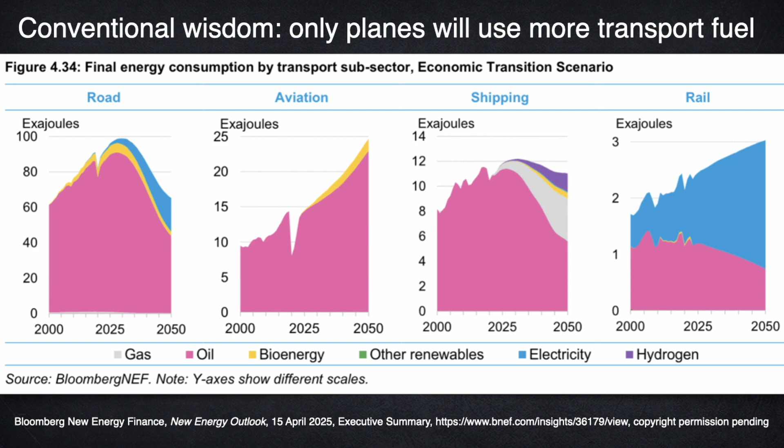By 2050, it's only 7% displaced by bio-based sustainable aviation fuel in gold. But this projection assumes that aviation fleet efficiency will rise only 8% by 2050. That's a lot slower than historically. Let's see how to falsify that assumption and make the aviation graph look like the other three.

I'm originally a recovering physicist, but for the past half-century I've been a practitioner designing super-efficient vehicles, buildings, factories, and equipment. Each winter and spring quarter, Joel Swisher and I teach that experiential course Holmes mentioned on how integrative design can make the energy efficiency resource several-fold bigger, but at much lower cost than normally assumed, and often with increasing returns. So the more you save, the cheaper it gets.

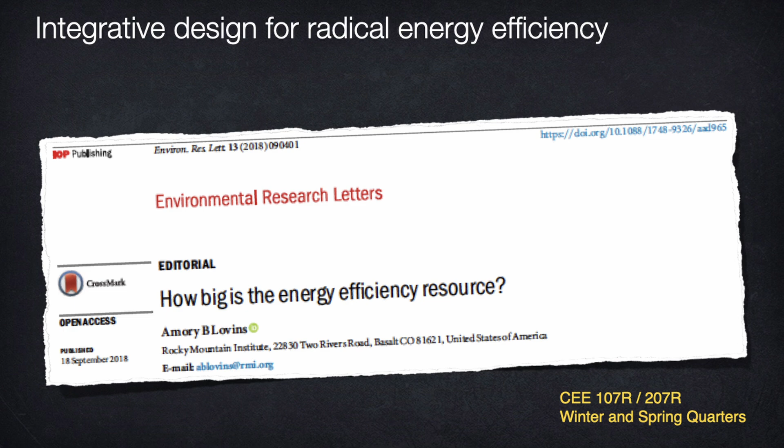And that's because, as this paper shows, we use not more or fancier widgets, but fewer and simpler widgets, more artfully chosen, combined, timed, and sequenced. So we design a lot of stuff out.

In 70-odd years and many millions of miles as an airline passenger, I've observed that airframe makers, although they are very good at what they do, could get much better at integrative design. What's their challenge? How far do airplanes need to fly, for example?

Well, a 12,000-kilometer flight like Sydney to San Francisco is in the rightmost bar of BNEF, Bloomberg New Energy Finance's distance histogram here. But such long routes are very exceptional. Of the global aviation carbon emissions in 2023, over half came from short trips on narrow-body or smaller planes. That's the dominant four aqua bars on the left side of the graph.

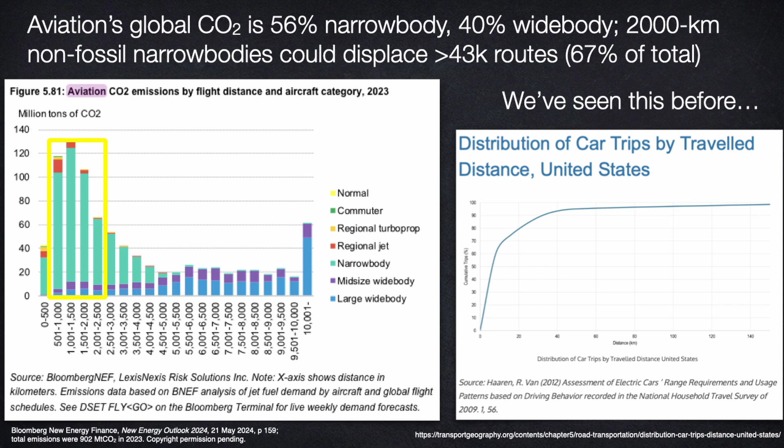Just a 2,000-kilometer range could cover two-thirds of the routes. Indeed, over a sixth of the emissions come from 1,000-kilometer or shorter routes. That's a big entry market to grow volumes, improve technologies, and cut costs.

We have seen this before. When Tesla introduced the first lithium-ion battery car in 2009, about 80% of U.S. car trips were under 20 kilometers, 96% were under 100 kilometers.

The two-seat Roadster adopted electric drive in a lightweight Lotus Elise fiberglass and aluminum sports car, and that combination had an impressive range, 393 kilometers.

And that made range a non-issue according to Car and Driver magazine, but many customers still did worry about it, and there weren't any fast charging networks. The 53 kilowatt-hour battery pack was also expensive.

The powertrain was handmade, so the real sticker price was 4 times that of a modern 4-seat Model 3. While providing ample range to win the confidence of early adopters, Tesla did need time to build production volume and cut costs, and reduce the car's energy use per kilogram by 16%, raise its top range by 40% so you could do long road trips, and store 42% more energy per battery kilogram.

The dominance of short trips bought them that time, so here we are. And now electric planes can apply the same strategy by starting with abundant short-haul markets and building out from there. However, unlike autos, planes need lift to stay airborne.

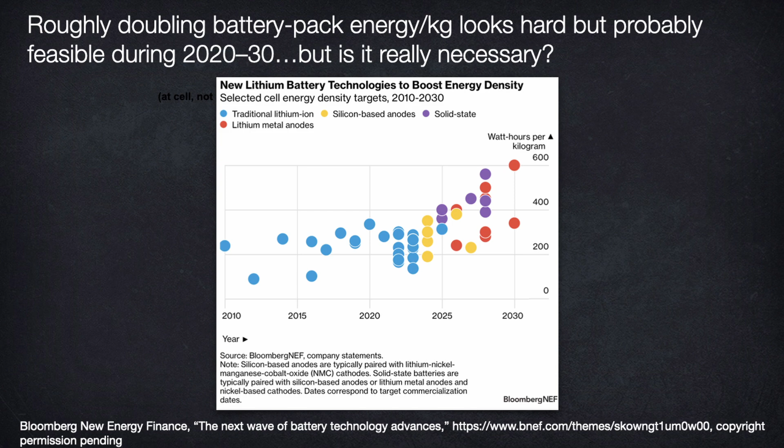Most aviation experts assert that for electric flight to get off the ground, if it ever can, it will need battery packs to store 2 or 3 times more electricity per kilogram than the best battery packs in today's EVs, and yet stay safe and durable and cheap. That is not easy.

It's authoritatively forecast anyhow, but it comes from asking and answering the wrong question. That is, it simplistically compares battery versus fuel energy density and propulsive efficiency in today's aircraft, rather than redesigning the whole aircraft for electric propulsion. It's a classic case of optimizing isolated components and thereby pessimizing the system.

But integrative whole system design of far more efficient airplanes can make the battery needs much milder. This was explained a decade ago in a remarkable technical paper by 2 distinguished NASA Langley aeronautical engineers. As the highlighted parts of their abstract say, the authors strongly validated my long-standing impression that electric aviation propulsion, whether from batteries or fuel cells, has compelling differences that they said will fundamentally alter the way propulsion integration is approached.

Integrative design lets electric propulsion, they said, not only compete but far exceed existing propulsion solutions in many ways at battery-specific energy densities of only 400 watt-hours per pack kilogram.

And that would yield, they said, 4 to 8-fold improvements in energy costs with dramatically lower total operating costs, while dramatically improving efficiency, community noise, propulsion system reliability, and safety, and with zero greenhouse gas emissions if powered by carbon-free electricity, which today is 41% of world electric generation and rising quickly.

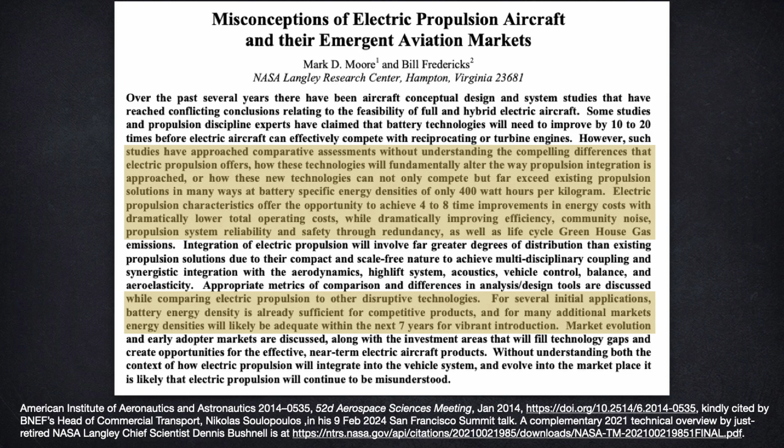So a decade ago, these NASA authors showed that, they said, for several initial applications, battery energy density was already sufficient for competitive products in some entry markets, and for many additional markets, energy densities will likely be adequate within the next 7 years for vibrant introduction.

So that was 10 years ago plus 7. As we'll see, that foresight proved accurate, if not conservative. As with the solutions EV makers found, only oil enthusiasts don't yet see this coming for EPs, and hope you won't either. Now, that NASA paper shows that electric propulsion is not just another way to produce thrust, but it creates important advantages and degrees of freedom not previously available, profoundly changing how the whole aircraft is designed.

Creating propulsion systems in isolation is common, but wrong. The economics are also far better for electric propulsion, changing market realities. This business opportunity, as we'll see, is here and now, and thinking it's far away risks grave disruption.

While batteries' energy density is important, it is, as we'll see, already adequate if it is offset by whole aircraft improvements. Batteries do cost more and weigh more. They don't get lighter as they're drawn down. They need meticulous safety and certification. However, electric propulsion has many offsetting advantages.

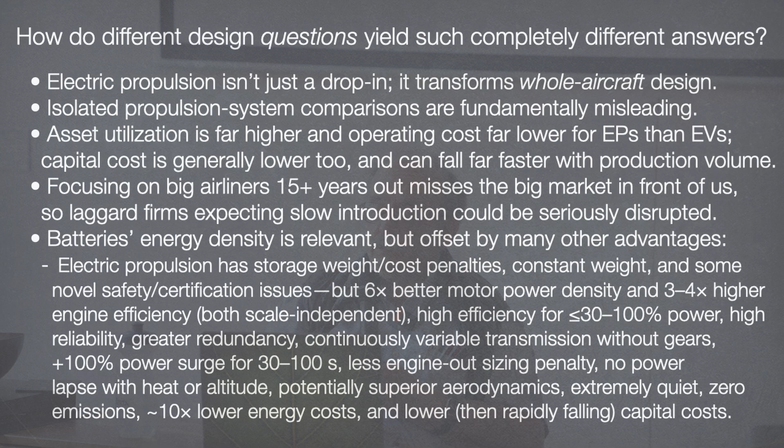It has a many-fold lighter powertrain and higher efficiency than fuels do, over a huge range of scale that invites exciting distributed architectures, many small electric motors, not a few giant gas turbines. Efficiency stays high over most of the power range. Torque rises. Thrust is widely variable without gears.

Energy for climbing can be recovered on descent. No combustion means no intake air or exhaust. Reliability and safety improve through greater redundancy, radical simplicity, and major power surge capability. Noise and engine dependence on density altitude nearly vanish. Higher altitude becomes feasible. Maintenance shrinks, emissions disappear.

Energy costs, that is, price times usage, fall by an order of magnitude. Capital costs also shrink even at low production volumes, and then quickly fall further as volumes build. Aerodynamics can fundamentally improve. So these and other advantages are at least as big as the drawbacks. And that's how you can make electric airplanes better, safer, and cheaper than fueled airplanes.

Now, bypassing the many technical details of that NASA paper, I want to offer you some simple examples and analogies to help you understand and perhaps extend those authors' compelling logic. And while I will address mainly energy efficiency, economics merit equal depth and emphasis, because economics determine what markets actually do, and in aviation, saved operating cost outweighs any extra capital cost.

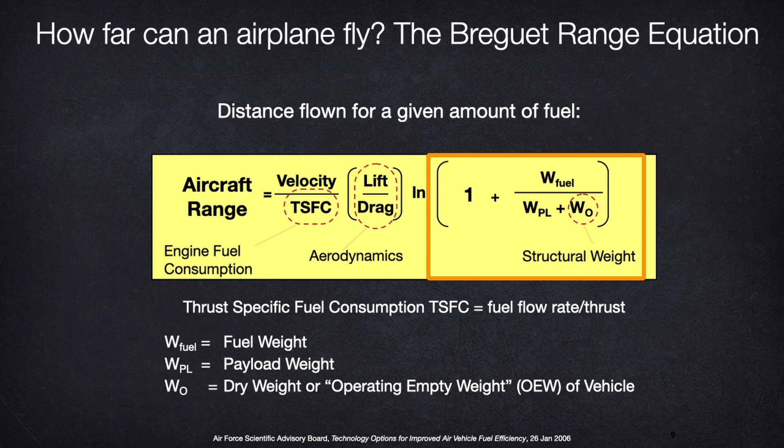Now, here's our one equation for this evening. The fuel efficiency of airplanes is proportional to three things: engine efficiency, that's the reciprocal of fuel use per unit thrust; aerodynamic efficiency, the ratio of lift to drag; and a logarithmic term based on the ratio of fuel weight to gross weight, that is, structure plus payload. That third term is necessary because the plane gets lighter as it burns the fossil fuel, turning it into about 6 or 8% of climate change.

So putting aside that fuel burn and some other complexities, the three prime variables to focus on are propulsive efficiency, aerodynamic efficiency, and mass efficiency, or in short, thrust, sleekness, and lightness. However, these three all interact, sometimes favorably, often not. Their interactions are complex, needing full system studies. Therefore, the many technology design opportunities I will mention and illustrate do not simply combine in a real aircraft at the systems level, nor across a full mission profile, not just cruise, but takeoff and landing and maneuver and such. So keeping that caution in mind, now back to the story.

Planes go about 10 times faster than cars, and aerodynamic drag rises as the cube of speed. Well, that's really important, but reducing weight is crucial too. That's the stuff you have to hold up in the air. But of course, the numbers differ for planes and cars. However, ultralight weight plus low drag crucially enables non-fossil fueled propulsion of both kinds of vehicles.

So let's spend a little time on some automotive facts, and I'll start with a physics analogy. Just a fifth of the modern gasoline car's fuel energy reaches the wheels and moves the car. Of that tractive load, the energy needed to move the car, nearly half, rising as the cube of speed, heats the air that the car pushes aside. Most of the rest heats the tires and road, and only the last 6% of the fuel energy accelerates the car and then heats the brakes when you stop.

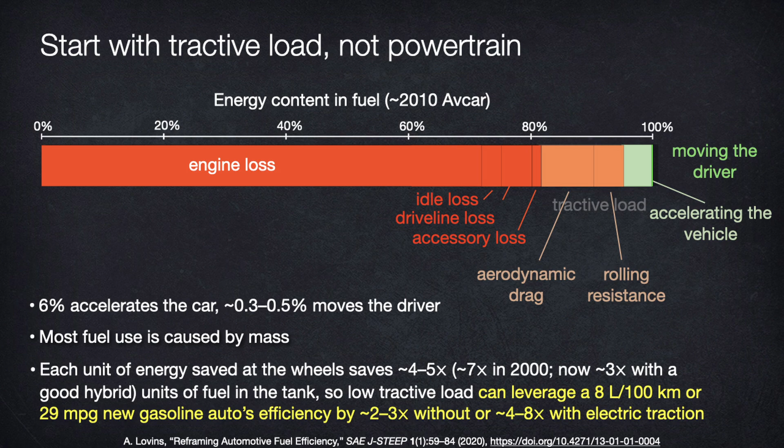Automakers cut losses mainly in the powertrain, the red part, because that's where the big losses are. That's harder than reducing tractive load, and it's a lot less rewarding, because saving a unit of fuel in the powertrain saves only one unit of fuel in the tank. But saving one unit of energy at the wheels avoids three or four additional units lost in getting the energy to the wheels, and therefore leverages four or five units of fuel saved at the tank.

Well, then we can double or triple efficiency in a fueled car without changing how it's propelled. Or we can roughly quadruple to octuple efficiency by combining low tractive load with electrification. The Utility Industry's Electric Power Research Institute in Palo Alto found last year that making EVs more efficient before they're electrified can cut U.S. costs of electricity, grid, and recharging infrastructure by more than $200 billion a year by 2050.

So we should therefore first reduce tractive load, then improve the powertrain, and the powertrain then shrinks for the same acceleration, F equals ma, and that saves more mass, and it also saves capital costs to help pay for the lightweighting. So how can that lovely synergy work in practice?

Well, let's look at this carbon fiber car that I drive. It's 55 kilograms lighter than a two-seat — this is half as many seats — 2009 Tesla Roadster. And it was profitable from the first unit that BMW sold in 2013, and for all 250,000 units sold over the next 9 years. But it's made of carbon fiber, which automakers had rejected as far too costly. Well, the trick is the carbon fiber was paid for by needing fewer batteries to propel the lighter weight car, and then fewer batteries recharge faster, they need less electricity and infrastructure, and therefore less money.

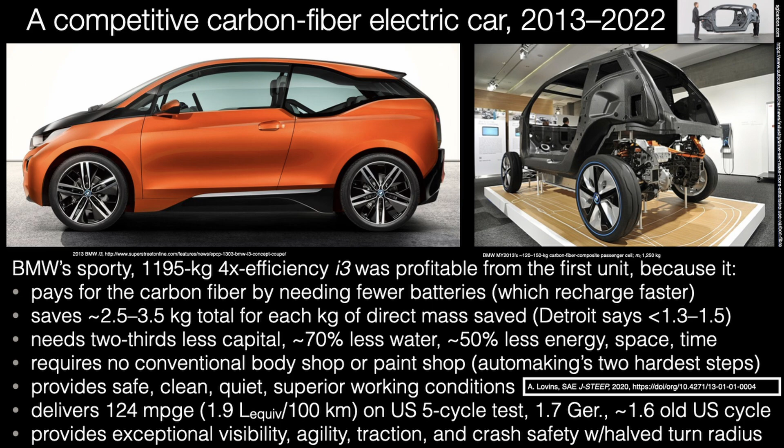Saved weight, about 300 kilograms, snowballs spectacularly, saving about 1.5 to 2.5 kilograms of secondary weight for each kilogram of saved primary weight. The assembly saves two-thirds of the normal capital and water and half the normal energy, space, and time. It eliminates the two hardest steps in automaking. It's much better for the workers, and it ends up quadrupling efficiency without compromise and with many driver advantages, of which my favorite is half normal turn radius and terrific visibility, no blind spot.

This design logic could also save up to two-thirds of the scarce battery minerals, and then there are five other multiplicative forms of efficiency to manage the rest.

BMW finished producing this model in mid-2022, although there are calls to resume production, and I suggested if they don't do that, they should just give the tooling to Ukraine.

Meanwhile, Bloomberg says China's strategy for its 2030 flagship cars includes carbon fiber structures displacing four-fifths of their iron and steel. If that happens, it could flip the global car industry. China already makes impressive EVs, some priced at just $5,000 to $10,000. So if China designed out another half to two-thirds of the costliest ingredient of its EVs, automakers elsewhere would have to follow suit or lose share.

Lightweighting is especially important because of mass decompounding, the snowballing of saved weight achieved by going repeatedly around the design spiral or design cycle.

So starting at the left, first you make the vehicle light and slippery, so you cut its tractive load, say, in half, and enable smaller and more advanced powertrain and smaller, lighter chassis components, less suspension to hold it up, less brake to stop it, and so on. Those leave more packaging volume and more crush space for safety.

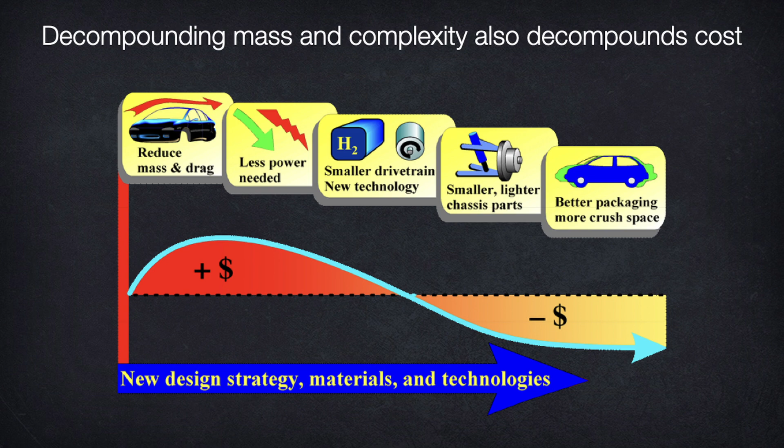Of course, that's cost per car, the way you buy a car. It is not cost per part or per kilogram, which is how most automakers and even the national academies mistakenly think about cost.

Aerospace designers are much more sophisticated than automakers about saving weight, but often not yet enough, and not only about weight. I once asked a room full of the top designers at a top airframe maker, what is it worth, whole system, end-to-end life cycle cost of ownership, to take a watt of electric load out of your airplane?

Half of them didn't know the number, but they were sure someone else in the company did. The other half scratched their heads a bit and said, well, actually, nobody in the company knows that number because we never asked that question before. It's an important question. It's complicated. We'd better figure it out. Well, I hope they do.

Now, strong lightweighting takes radical simplification. Let me tell you a story.

Tesla's original Roadster had a two-speed gearbox that kept blowing up because it couldn't deliver 0 to 60 miles an hour in 4.6 seconds and 125 mile an hour top speed. After two manufacturers failed, the chief engineer, J.B. Straubel, was griping one day.

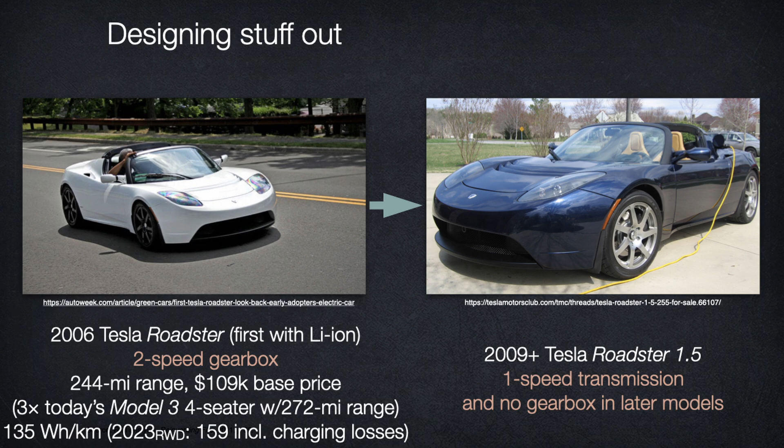And so was born the 2009 Roadster 1.5, which eliminated the gearbox. That gained 16 kilometers of range, saved over 6 kilos of weight, 30 kilowatts more tractive power, less noise, less maintenance, less warranty cost, and 3-digit fewer manufacturing dollars in an industry that'll kill for a nickel.

That little story and its competitive implications later triggered the electrification revolution at a major U.S. automaker. The same relentless pressure for simplification is now overcoming automakers' tendency to equip components with individual heating and cooling systems, or with forests of hoses.

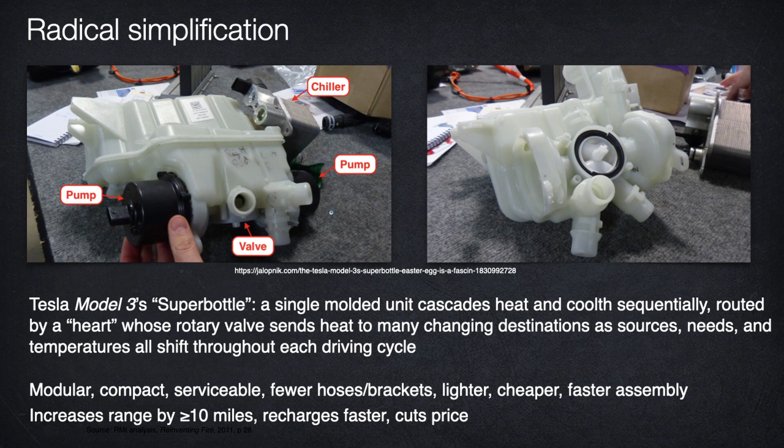Tesla's Model 3 instead used a single-molded plastic heart whose four-way valve redirects thermal energy real-time from where it is to where it's needed, optimally sequencing and cascading temperatures. It took Sandy Munro two weeks to figure out how it worked. It was that clever.

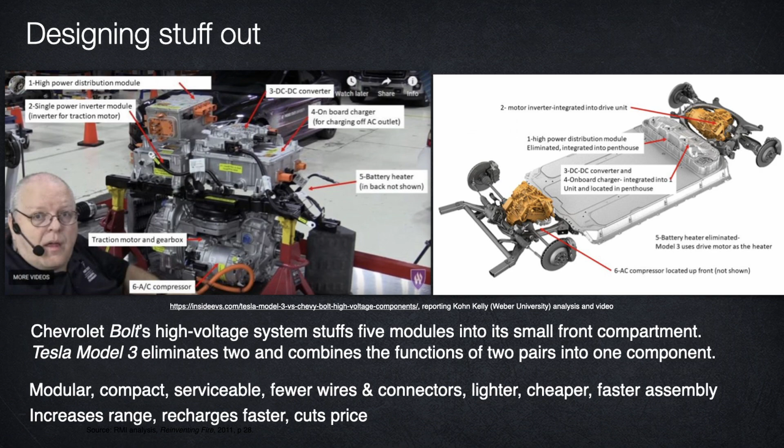Likewise, of five separate power-related modules in the Chevrolet Bolt stacked together in the left photo, Tesla's Model 3 eliminates two and consolidates two more into other modules. So again, it radically simplifies the system and achieves the same familiar suite of benefits.

Airplanes offer similar opportunities, they're just more valuable. Now, how low can the tractive load of cars go?

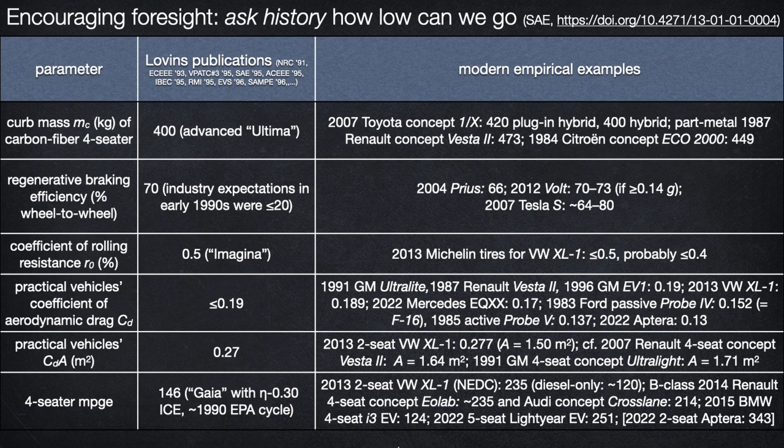Well, this table from my 2020 Society of Automotive Engineers paper, Reframing Automotive Fuel Efficiency, shows how my early 90s analysis of six critical platform parameters inferred from historic concept car and component data what efficiencies in the second column production cars should be able to achieve over several decades, that is, by about now, because the papers were in the early 90s. Those empirically grounded estimates were heavily criticized at the time, but three decades later, they are eerily close to the market offerings on the right.

That kind of over-the-horizon radar signal is vital if you want to substitute accurate technological foresight for marketplace shocks. I think collecting weak but real signals can enable accurate inferences about future aviation too, because whatever exists is possible. So let me offer you a suite of further examples.

Remember how saving automotive energy by taking out mass or drag leverages much bigger fuel savings back at the tank? Well, the same is true in planes, but it's even more valuable, and you have to carry the fuel around in the air. So with a 40-odd percent efficient jet engine, each unit of mass or of lift to drag ratio saved in the airplane saves over two units of fuel directly, and then even more with mass decompounding.

This multiplier also raises the value of saving onboard electricity. Even a quite efficient 787 Dreamliner drawing about 400 kilowatts of electric power at cruise is not yet fully optimized.

Optimization for whole system lifecycle value might show, let's just make up an example, that if you replace this $20 coffee pot with a $200 vacuum super insulated internal element coffee pot, maybe it'll save thousands of dollars worth of fuel each year. Boeing estimated that optimizing electric loads might add a couple of percentage points to the 787's roughly 20% gain in fuel efficiency.

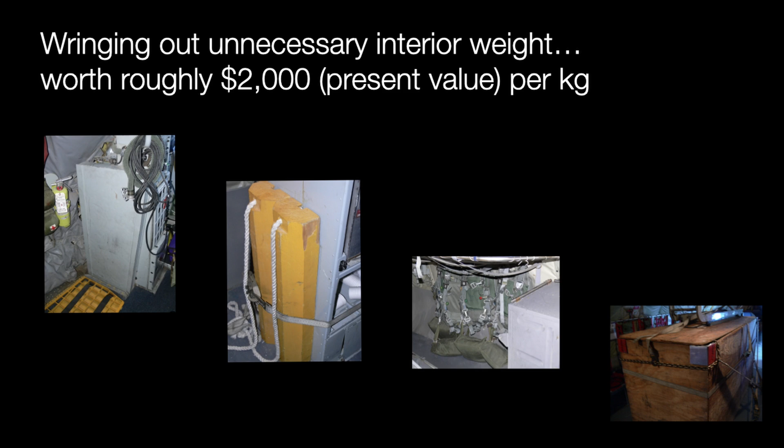I was once hitchhiking on a KC-135R military tanker, and I noticed a whole bunch of heavy objects that didn't need to be there. So next morning, I briefed my observation to a couple of Air Force two-stars, and that afternoon they launched a treasure hunt, and they found in that class of airplane $2 billion worth of weight savings and fuel savings that nobody had been responsible or rewarded for taking out.

Likewise, as an airline passenger, I noticed very uneven attention to weight. They really sweat the details of lightweight toilet paper and magazines while overlooking very heavy tray tables and, until very recently, heavy galley carts. And, of course, airframe makers could do a lot more with basic structural weight, too.

Our lightest big passenger planes are still only half carbon fiber composites by mass, but three decades ago, Dave Taggart at the Lockheed Martin Skunk Works led for DARPA the design of a 95% carbon composites advanced tactical fighter airframe that was one-third lighter but two-thirds cheaper than the 72% metal base design for this joint air strike technology, later called the Joint Strike Fighter.

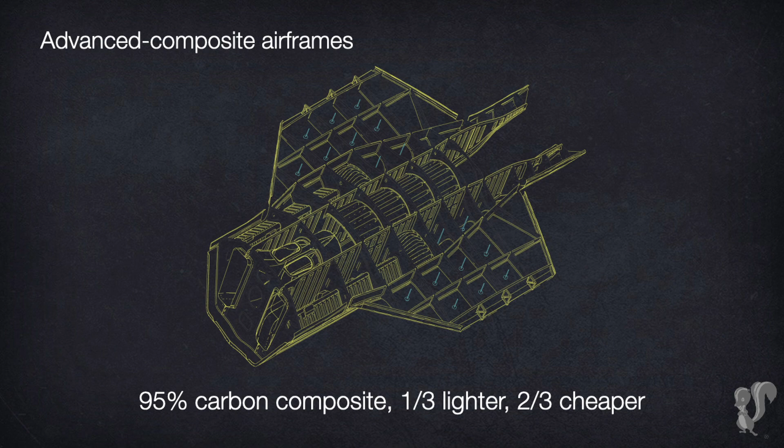Here's a closer and flatter look at it. Here are some of the benchmark numbers. The three or four-fold lower production cost for this 735 kilogram lighter airframe showed, as BMW did for cars later, that ultralighting need not cost more and may cost less.

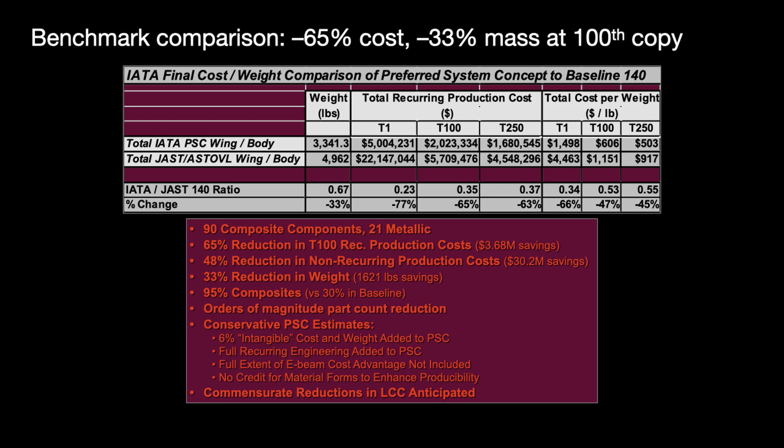And the cost would be even lower today because the leader of this Skunk Works project moved to RMI in 2000 and led our hypercar spin-off's development of a cost-effective SUV with half the normal weight and four to six times greater efficiency, but a U.S. retail payback under two years at mid-volume.

A team led by another RMI engineer at that spin-off, now head of advanced composites at Apple, where BMW's i-project leader then led the Titan car project, later developed the Fiberforge process that makes competitive structural carbon fiber parts, and it made this test piece, my carbon cap, for military ballistic helmets in one minute, sixteen years ago.

It's tougher than titanium, rings like a bell. I'll pass this stuff around, just please make sure I get it back.

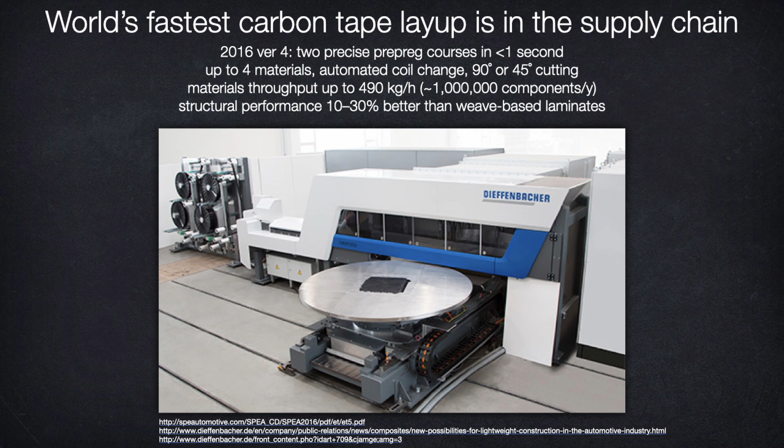This process made a lot of airplane parts, like composite window frames that went from concept to commercial flight in 6 months. We sold the technology to a German Tier 1 pressmaker in 2013, and the process as embodied in this machine, released 3 years later, can make a complex 2 by 2 meter structural carbon fiber part in 1 minute, or over 1 million smaller aerospace parts per year. It can become several-fold faster if desired.

Here's another couple of bits. That's a piece of helicopter floor that is marine-proof, that is, a Marine with a fire axe can't do any damage to it. Probably not used to having plastic sound like that. This machine could also become several-fold faster if desired.

I mentioned this technology just in case any of you think that making advanced composite airplanes and their structural components has to be small and costly. It doesn't. Now, to be sure, advanced composites are slowly and incrementally displacing metal one piece at a time. Current trends include carbon fiber wings and elliptical fuselage forms that have a 787-like passenger compartment on top of a skinnier 737-like cargo hold, so you can fit more seats with less drag and less weight. But a lot of components still made of metal in airplanes should not be, and the barriers are not mainly technical or economic, they're cultural.

Radical designs like that 95% carbon composite joint strike fighter require revolutionary design mentality, designing in the future, not in the past. When the Soviets shot down Francis Gary Powers' U-2 spy plane in 1960, Kelly Johnson, head of the Skunk Works, did not say, 'I'm going to design a slightly better U-2.' He said, in paraphrase, 'I want to own the skies for decades, so we'll design a Blackbird, SR-71. I don't know how, but we'll figure out.' They did. It took about 13 months. Because Johnson understood that such an airplane was impossible within the conventional design context.

That's because design is like a rubber band. If you try to stretch it too far from the conventional design space, you encounter more and more resistance and eventually it breaks. But if you jump to the new design space you aspire to, you can stretch the rubber band back to fit technologies that aren't ripe yet, and then as they mature, the rubber band relaxes to where you wanted to end up.

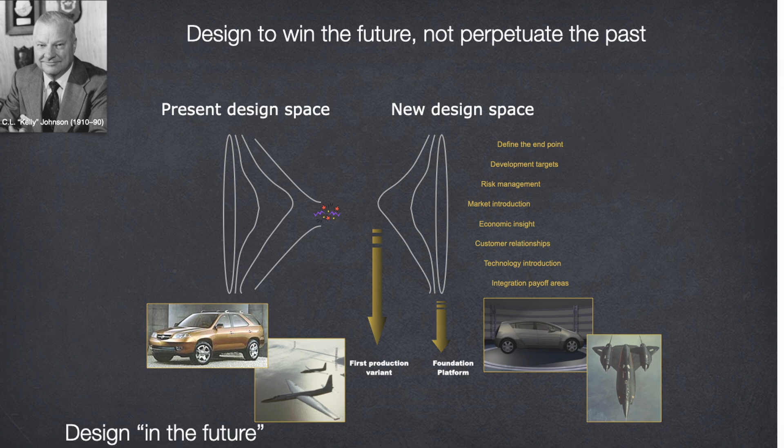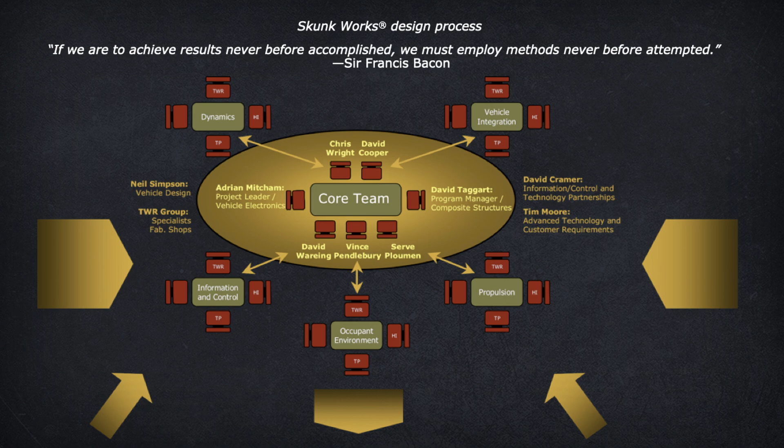Ultralighting requires not just smart and uninhibited designers thinking in the future, it also requires organizing the designers differently. Dave Taggart brought us from the Skunk Works our Revolution SUV's design process. We had 7 engineers all around the same table, collectively responsible for dauntingly ambitious whole vehicle requirements that the industry had no idea how to meet. Each engineer also owned one major vehicle system or function, but for those we deliberately wrote no requirements because we didn't want him to make his problem into her problem. We wanted to make the whole team design a highly integrated vehicle together. 2 of the engineers were not comfortable without their very own requirements, so in the first couple of weeks we replaced those folks, and then it went great and we got the intended result.

Toyota asked how we did it. We told them, and in 2007 out came a 70% lighter, that is a 400 kilogram hybrid concept car you'll see called the 1X. And thus the ultralight carbon fiber electrified hypercars that I invented 34 years ago, and we designed with industry 25 years ago, developed those design methods that Toyota used 18 years ago to design that 70% lighter 1X hybrid.

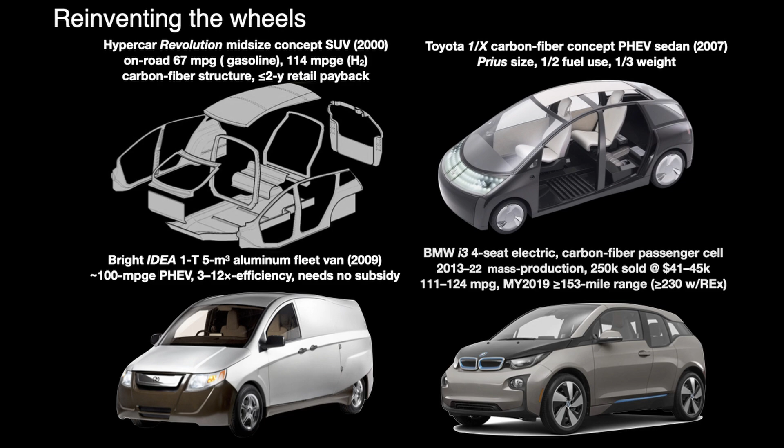Similar methods then entered the market in 2013 with the popular and profitable BMW i3 I showed you earlier. But even 1-ton lighter aluminum fleet vans, like this hybrid that another RMI spinoff developed and road tested in 2009, could save 1/5 of U.S. auto fuel at lower life cycle cost with no subsidy. And carbon fiber autos made in our simplified way at normal cost could save more oil than Saudi Arabia lifts, at an extra cost that a decade ago was under $18 per saved barrel. Today it's in the $0 to $7 range.

Indeed, two-thirds of the EVs now made in China are already at or below sticker price parity with their gasoline equivalents. In other words, they save oil at negative capital cost, and so do two popular U.S. electric vehicles.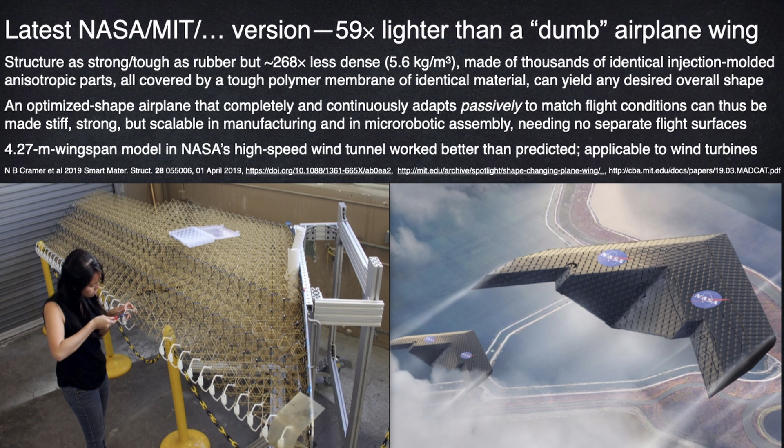It can also eliminate movable flight surfaces. Every part of its entire shape passively adapts to optimize continuously for real-time flight conditions, like a bird's wing. Thousands of identical anisotropic molded polymer cells, centimeter-sized, can be assembled by swarms of programmed robots or grad students, whichever are cheaper, into an airplane of any desired shape. This cutting-edge technique opens revolutionary prospects for lightweighting, aerodynamics, and cost reduction.

It has been prototyped as an airplane for Airbus and as a car for Toyota. It can even form a vacuum balloon, buoyant but crush-proof in air, and a really big one could lift 24 times the payload of a 747.

Alternatively, these hooked-together miniature structures are as strong and stiff as solid structures, but they're up to 90% air. They don't even use carbon fiber. After carbon fiber could come Miralon's or Dexmat's carbon nanotube structures with up to 10 times higher mechanical performance. And now we can make similar near-nanotubes from sugar, water, and sunlight via the bacterial enzymes that hummingbirds use to weave their nests. Another approach uses nanoprinted metals with optimized microstructures.

Airbus's collaboration with Autodesk generated this 45% lighter partition for the A320 and exciting design concepts for whole airplanes. Of course, the same logic applies to 3D printed metal parts as to bird bones. As usual, nature has done all this before.

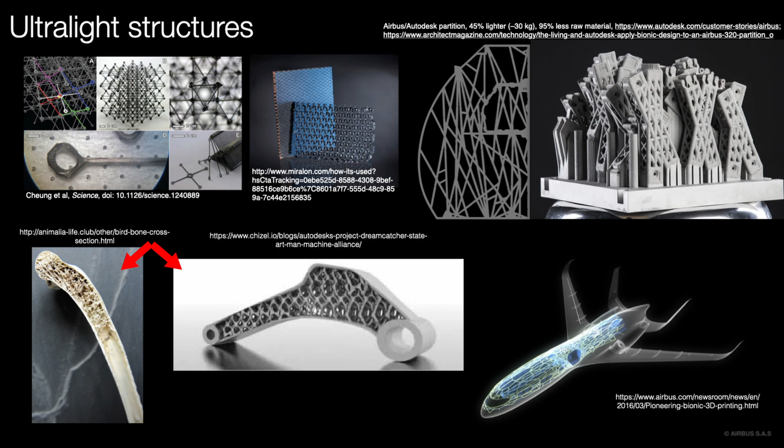Indeed, extinct pterosaurs, the biggest flying creatures in the history of life on Earth, had wingspans of about 10 or 11 meters, three times that of today's biggest birds, thanks to bones with paper-thin walls stiffened by internal struts. There's a new Nature paper revealing complex porosities that made the bones much lighter, slightly bendier, and able to combat and heal cracks. So this paleobiomimicry is applying designs from a sixth of a billion years ago to improve today's aerospace structures. Way cool.

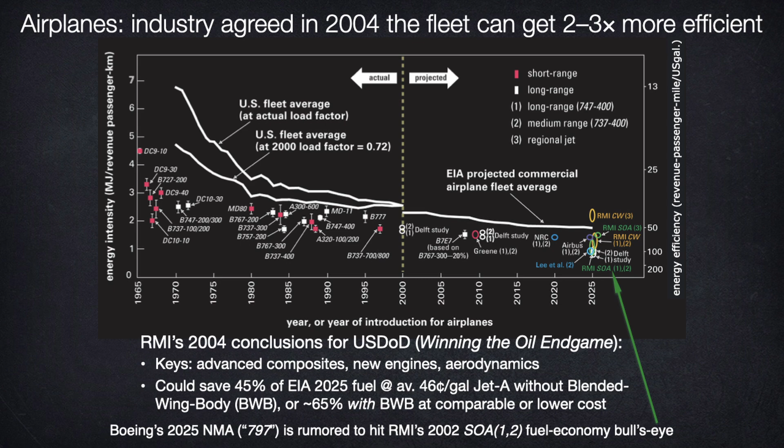Of course, airplanes have long been getting more efficient. Those U.S. certified from 1960 to 2000 cut fuel intensity by 70%, half from better airframes, half from better engines. That progress remains on such a steady and plodding course that Boeing's so-called NMA, or 797, was expected to hit this year exactly the efficiency bullseye that we had estimated in 2004.

But uncertain and often cash-short customers, incremental thinking, restricted vision, market turbulence, and Boeing's recent deculturation make the industry's trajectory too slow, raising efficiency by just 20% per generation. And at that rate, it could take another century to do what we knew how to do a decade ago. By then, we're cooked. Aviation does about 6 or 8% of the cooking.

Next generation options are well known, effective, and profitable. Among the most obvious prospects already emerging, advanced composites will lighten aircraft by at least another 20% and enable the elliptical fuselage. Morphing wing technology can save over 10% of fuel in new clean sheet designs and over 3% in retrofits, while reducing noise 10 dB.

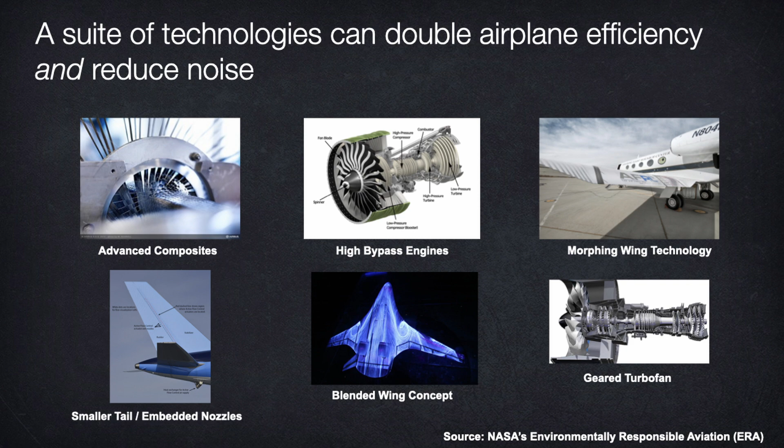Geared turbofans can be 15% more efficient than conventional jet engines. Blended wing body designs can often save over 40% if we change manufacturing and how we board and deplane. But there are a lot of other innovations available, and they get powerful in combinations.

In 2013, NASA did this roadmap showing 50% fuel savings from the 2005 baseline would be available by 2020, and 60% by this year, 2025, as shown in the right-hand yellow column. However, airframe makers moved much slower to adopt these pretty obvious techniques.

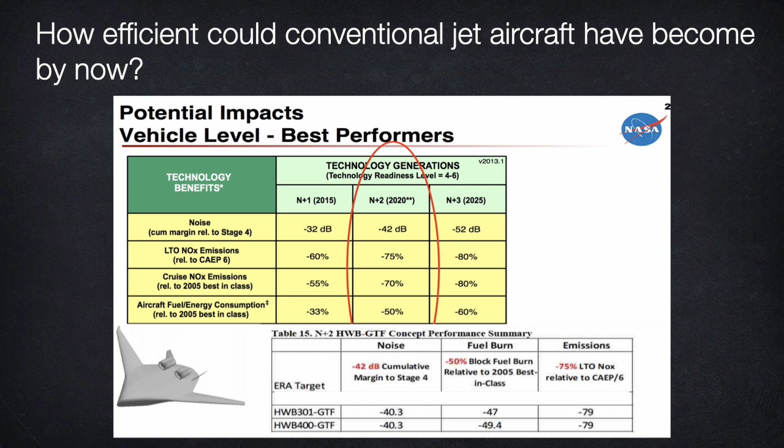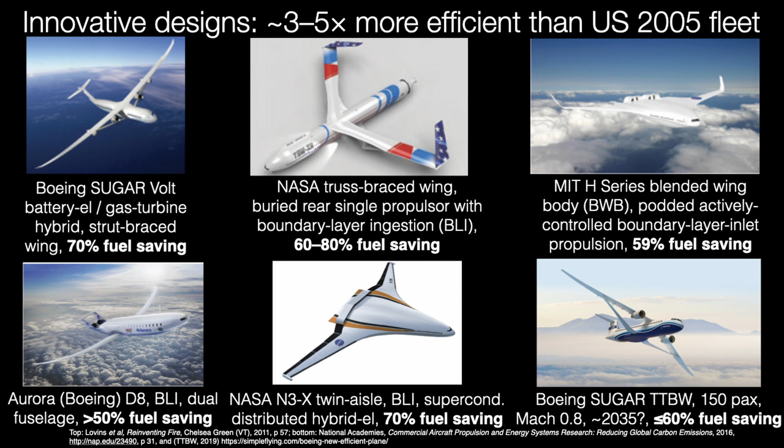These are some designs to illustrate how more ambitious combinations of current technologies can boost the U.S. commercial fleet's efficiency cost-effectively by 3 to 5-fold over its 2005 level. The upper three designs are from Boeing, NASA, and MIT—they're a decade old. The lower three are several years old. Both sets can save about 50 to 80% of the fuel versus the 2005 best-in-class or versus today's fleet.

They use things like strut-braced or truss-braced wings, riblets, advanced composite structures, hybrid electric propulsion with gas turbine-assisted takeoff and range reserve but electric cruise, podded or buried propulsors, boundary layer ingestion, some blended wing body designs—like in the bottom middle—and other expanding innovations.

The then chief scientist of NASA Langley, Dennis Bushnell, told me 6 years ago that proper application of truss-braced wings with advanced aerodynamics can raise the lift-to-drag ratio from about 18 or 19 with tube and wing designs, or about 22 or 23 with blended wing body, to 40 to 60 plus, while considerably reducing weight. The Swiss laminar flow wizard Werner Pfenninger even designed lift-to-drag as high as 100, nearly 5 times current norms. Very impressive. The best German gliders are in the 70s.

Bushnell suggests further adding other refinements. For example, he suggests thrust vectoring from fully aft propulsors to eliminate the tail, the empennage, and replacing landing gear and heavy brakes, which total on the order of half the fuselage weight, with lower impact automatic landing and deployable parachutes for refused takeoffs. So there's still a lot of hidden treasure out there. Even simple changes can be highly effective.

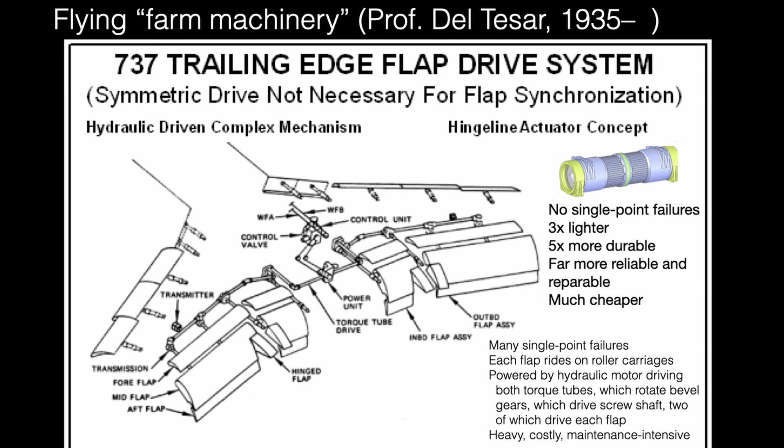Next, we can eliminate hinged flight surfaces. Like the Wright brothers' bendable canvas and wood, flight surfaces can now morph real-time to adapt to flight conditions, leaving the surface and airflow smooth, as in these two methods. The first method has entered the supercar market in front and rear wings for an Aston Martin. They morph to maintain downforce at any speed. It's also expected to save about 2 to 11% of the fuel in planes, and the Air Force has committed to deploy it on several hundred once flight tests are completed.

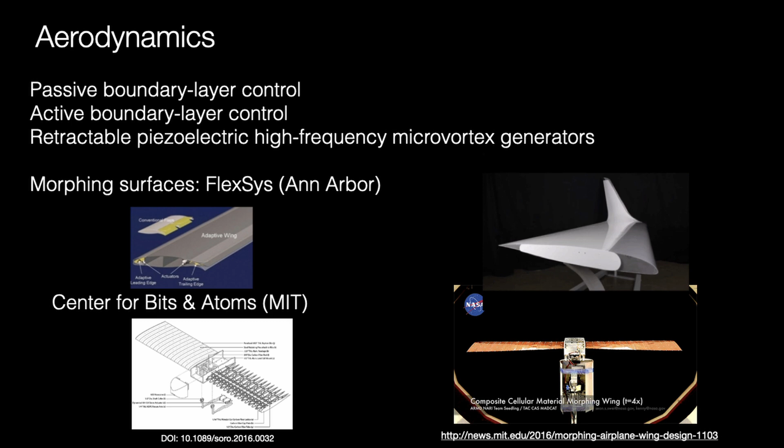The second method uses the lattice and membrane structure you just saw. Nature is rich in great aeronautic designs like the tropical cucumber seed that can glide for hundreds of meters. Not to mention the California condor.

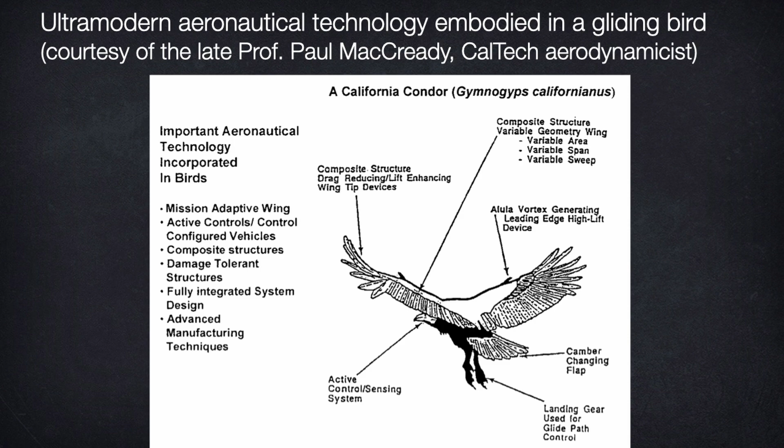Besides all its advanced geometries and structures and controls, I especially like fully integrated system design and advanced manufacturing techniques, listed by the late great aerodynamicist Paul MacCready, who gave me this picture.

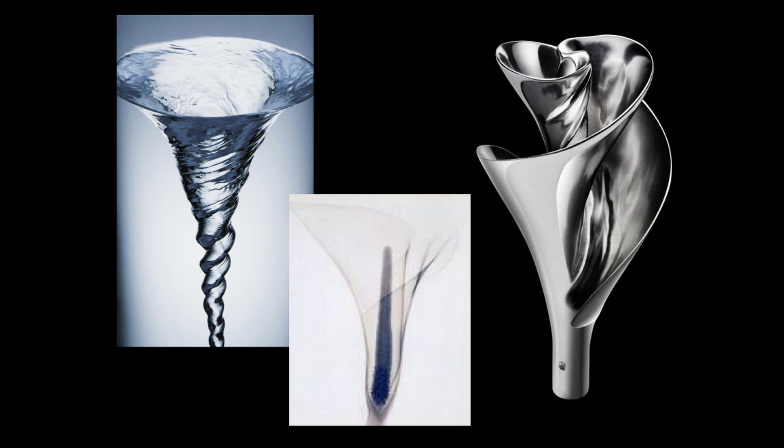Now, can biomimicry raise propulsion efficiency? Jay Harman is an Australian naturalist and sea captain. He's imitated the Fibonacci structure in natural vortices to make super efficient fan and pump motors like the tulip-shaped pump rotor that can spin underwater at thousands of RPM with no cavitation. Now, if your 100,000 or so kilometers of fractal blood vessels had the design and friction of standard industrial piping, you would need a heart bigger than your body. Very inconvenient. But your third of a kilogram, 1.5 watt heart suffices because your bloodstream uses laminar vortex flow. Airplanes don't do that yet. They should. Disclosure, I own about 1,000th of Jay's holding company, which is called Pax Scientific.

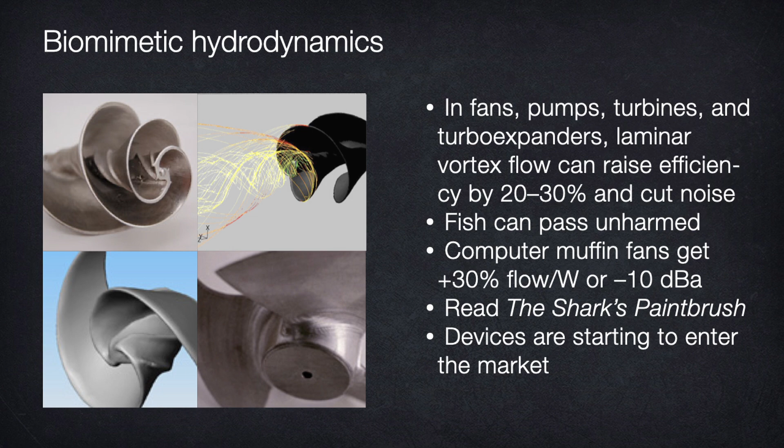Such rotors can empirically raise pump and fan efficiency by about 20 or 30%, not quite violating the pump equation, and computed and observed pump behavior now match up nicely. Some of Pax's diverse super-efficient fans, propulsors, winglets, and hulls are now on or entering the market. Remarkably, their efficiency gains are independent of scale and independent of Reynolds number. So for air as for water, cheaply converting standard fuselage airflow to laminar vortex flow or toroidal flow regimes, everting toroids going back, can cut drag. In one early torpedo trial, they cut drag by 14%. Remember, the Reynolds number doesn't matter, so you should be able to do the same thing in air.

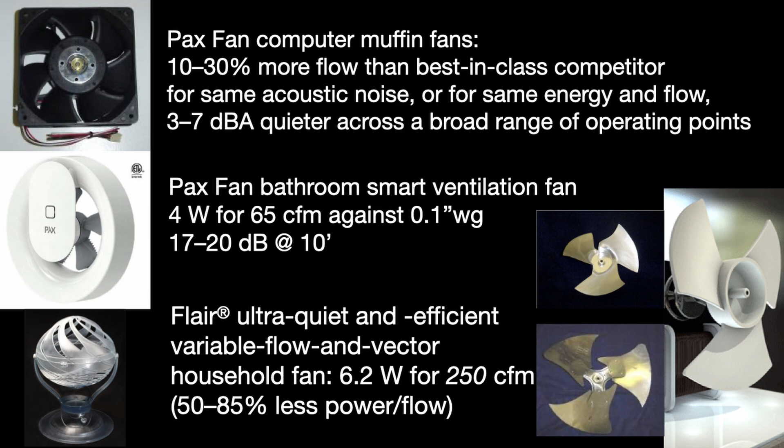Pax's household fans are far more efficient and quieter than conventional fans. The latest one uses 50 to 85% less power per unit of flow than its competitors from Holmes, Vornado, and even Dyson, while providing higher air velocity with a lot less noise.

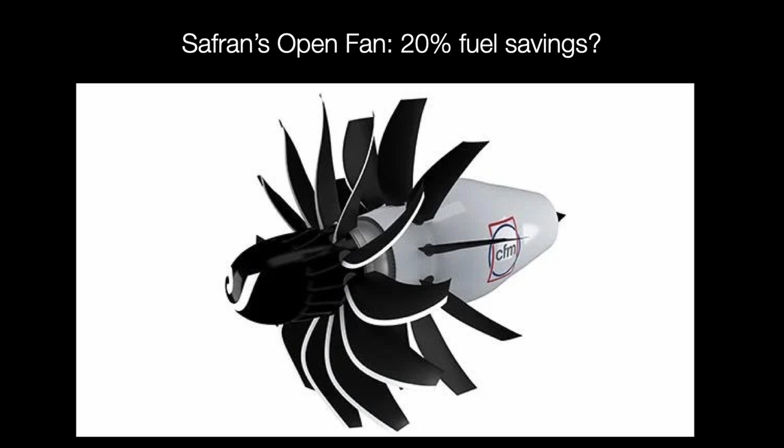Might its principles yield more efficient propulsors? Just a fan backwards. Safran and GE's joint venture CFM International is testing an unducted or open rotor with one rotating stage and one stage of non-rotating variable pitch blades. Bypass ratio is over 70 versus 10 for a giant 777 engine with its carbon fiber blades. A 20% fuel saving is expected in service by the mid-2030s. I wonder if such designs could benefit from subtle Fibonacci shapes like Harman's biomimetic fan blades.

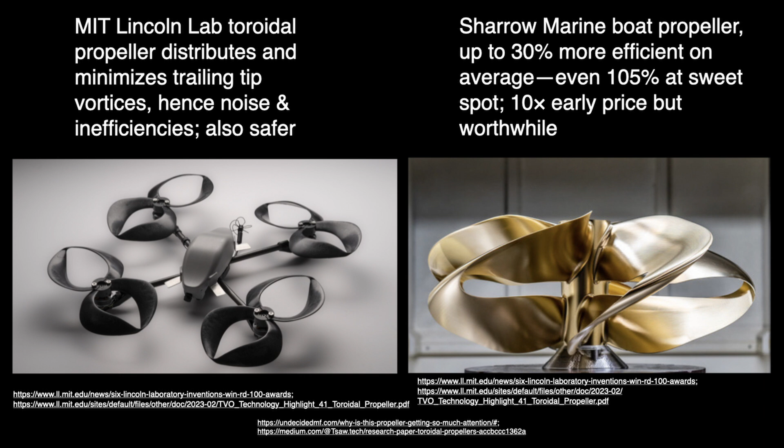Another suggestive innovation, rediscovering a 120-year history with over 160 patents, is the award-winning toroidal propulsor for quiet drones on the left, developed by MIT Lincoln Lab. It's an old concept, said in a U.S. patent to improve lift to drag by 40 to 60%. They were working on ring wings, and some 35-40% of a typical aircraft's drag is due to wingtip vortex formation, but the toroidal propulsor has no wingtips and therefore no vortices shedding off them. It may weigh more or maybe less per unit thrust, depending on the materials.

There's a parallel development by a musician seeking to abate annoying drone noise, and it's been successfully commercialized as a marine propeller on the right, available 3D printed from online makers, or in this elegant marine bronze from Sharrow Marine. Both air and marine versions can reduce fuel use and acoustic signatures very markedly.

Now let's start putting these pieces together. 4 years ago, I visited William Otto Sr. and his team in Southern California. Bill used to be chief scientist avionics for the B-1 bomber. He has quite a team, and since '07, his firm has been developing this radically optimized plane that exited stealth mode 5 years ago.

It has demonstrated about 59% lower drag than a standard business jet, thanks to highly laminar flow—I'll call it super laminar—over the entire fuselage, wings, and tail. The critical areas, most of the plane, have no rivets, no seams, no gaskets, no gaps.

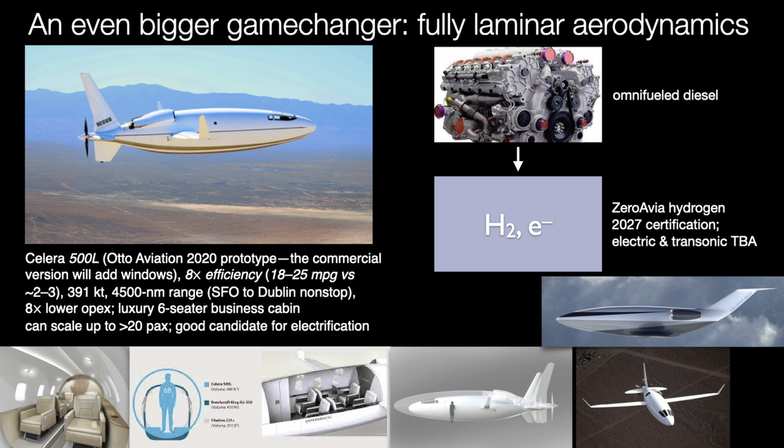Electric designs are also underway and look very promising, because the super efficiency displaces many heavy batteries. I think this may be the most important new plane family in decades.

And now we're starting to hear about the transonic superlaminar Celera 800. But let me just point out that the 500 demonstrator can go, say, San Francisco to Dublin on 1/8 the normal fuel. I mentioned earlier factor 8 efficiency was already demonstrated some years ago in this same state. Now, as is usual with integrative design, benefits compound.

Greater lift-to-drag ratio reduces the fuel volume and weight for a given range. Less fuel means smaller wings, powertrain, and structures. So a 30% drag reduction compounds into about a 60% fuel saving.

Moreover, sustainable aviation fuel's higher price is more than offset by the fuel saved, so the direct operating costs using pure SAF can be half those of a standard business jet burning Jet A.

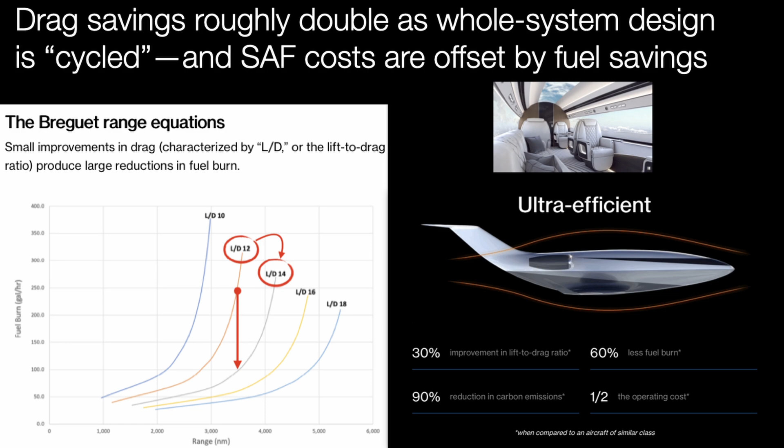The Celera 800 design's carbon emissions, 36 grams CO2 per seat mile, are virtually identical to those of common EVs at 34. Another fun innovation is panoramic digital windows, which they call supernatural windows, that save weight, improve laminar flow, promote thermal and visual comfort, and make the cabin 20% bigger.

Back in 2011 and 2012, EADS, now Airbus, published a provocative technical design study for a largely laminar flow, bulbous, pusher fan, 68-passenger turboprop with 900 nautical mile range and some basic efficiency improvements. It had about 25% greater energy efficiency, therefore smaller batteries, and the resulting decompounding of mass and other burdens could reverse, they found, more than half of the near doubling of weight from the electrification.

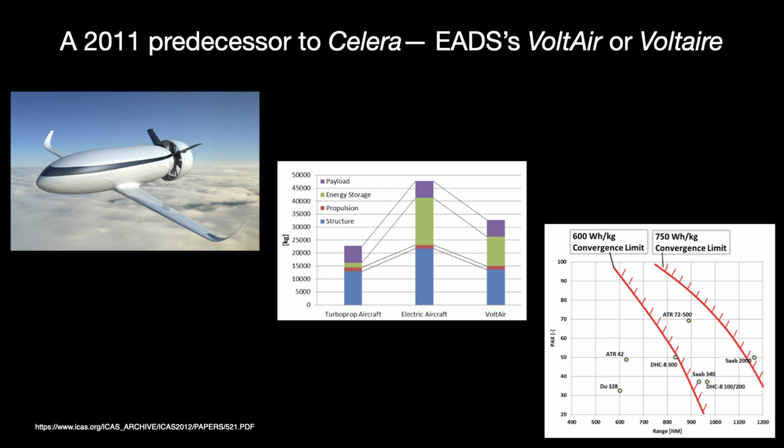Again, this shows you can do far more with milder battery progress. The authors at EADS concluded that typical payload and range missions flown today can thus be realized with 750 watt-hour per kilogram battery systems, compared to 1,000 necessary for the conventional configuration. In other words, you can do the same thing with far less ambitious batteries if you also get very efficient.

Well, that was correct in 2011. Now we can do much better. It would not surprise me if ultralighting and ultralaminar flow and other efficiency advances, already proven and starting to enter the market, could converge with better batteries, motors, power electronics, and even ultralight photovoltaics, some already commercial at 40% efficiency, to make electric planes rival, if not surpass, the key parameters of today's kerosene planes.

That is exactly what just happened with battery electric cars. Even I used to think those were, as a Dutch critic put it, cars for carrying mainly batteries, but not very far, not very fast, or else they'd have to carry even more batteries. Well, that was wrong, and now I own two fine battery electric cars. I wouldn't dream of going back, and today's best battery electric cars beat fossil-fueled cars in every way.

Let's look at a few interesting car examples. This doesn't have to depend on new materials. As our aluminum van showed 16 years ago, you can do a lot even without carbon fiber.

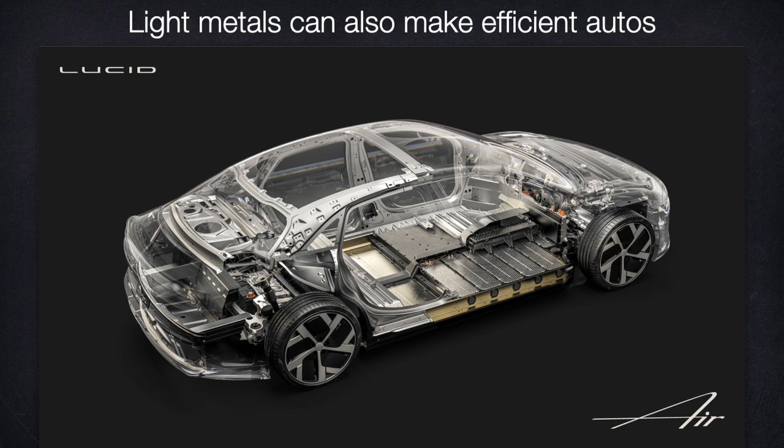Lucid's Air model, from Newark, California, the Motor Trend Car of the Year in '22, uses a compact powertrain to help fit a spacious luxury interior into a mid-size package. And it's so efficient, it got a record EPA range rating of 512 miles and does 0 to 60 miles an hour in as little as 1.9 seconds. Can your gasoline car do that? Will your neck tolerate it?

Mercedes did a developmental car in 2022, 252 miles per gallon equivalent, thanks to a 95% battery to wheels efficiency, exemplary drag coefficient of 0.17, and a lighter curb mass. That tested at a range of 747 miles, over 1,200 kilometers, with a battery sized for a compact EV. The battery pack is 30% lighter and 50% smaller than in the comparable production model. That just shows you how fast batteries are evolving with the help of electric race car technologies.

So I think range anxiety is going to become as obsolete as the speed of your modem. Remember modems? You might be too young to remember modems.

And despite some fiberglass, this sedan is basically steel and aluminum. It's not advanced composites, so there's a good deal more range and efficiency on the table. Some of the powertrain, by the way, is in the CLA model that Mercedes is bringing to market later this year.

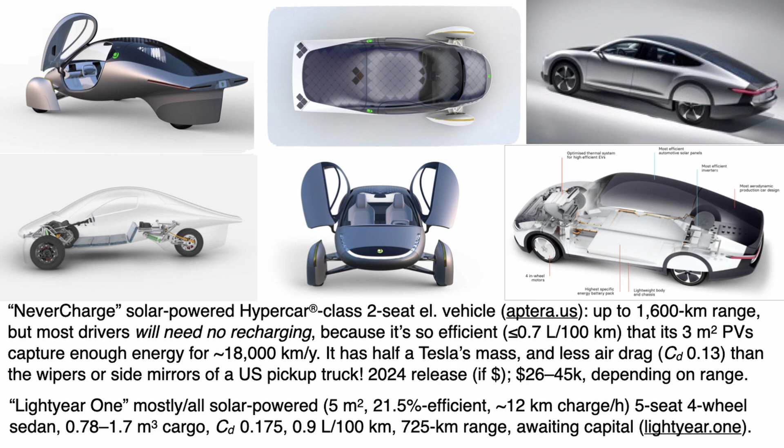It's as if your present car magically added 2 gallons of fuel to its tank every day you park it outside. To make a long trip, you can quickly recharge the tiny batteries with household electricity, and they plan models with ranges up to 1,000 miles. Now, my BMW and Tesla electric cars are among the most efficient now sold, but this two-seater with a very crashworthy carbon body is going to nearly triple Tesla efficiency to the equivalent of 343 miles a gallon.

Then there's the Dutch firm Lightyear, also ready to produce a 5-seat, four-wheel, light, very aerodynamic car with 5 instead of 3 square meters of solar cells on top, 251 miles per gallon efficiency, and it can add about 12 kilometers of range per hour in the sun. So the charging infrastructure that conventional EVs have to pay for, these super efficient vehicles aim to bypass, and even they can be further improved.

There's a similar story, by the way, in electric heavy trucks. Tesla's Semi 18-wheeler triples to sextuples current fleet efficiency with impressive economics, but critics thought its extra battery weight would reduce its payload. Turns out not to be true. The propulsion equipment is much lighter, so displacing 3 tons of diesel powertrain and its fuel keeps the payload unchanged with just modest lightweighting of the platform, and that could expand further if Tesla decides for marketing reasons to raise the standard payload. That'd be pretty neat.

How about aviation propulsion? Well, in gas turbines, the National Academies expect several more decades of 7% per decade efficiency gains beyond the current, probably a bit over 55%. GE's 3D printed complex fuel nozzles famously helped make one engine a tenth more efficient.

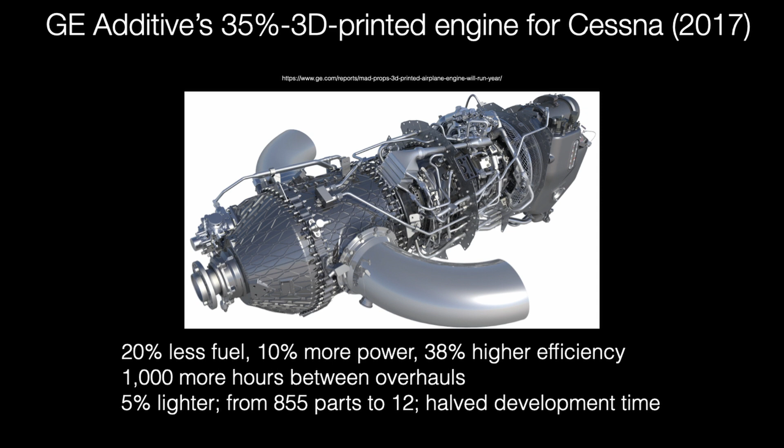8 years ago, this business turboprop delivered 10% more power from 5% less weight with 20% less fuel and 99% fewer parts. GE has a production version called Catalyst, the first clean sheet turboprop engine in over a half-century, that was just certified by FAA and has a 16-to-1 pressure ratio.

Last year, GE invested over $650 million in full-scale production of 3D printing-enabled engines for bigger planes, including one with over 300 3D printed parts. That's the GE9X engine for the giant 777X planes.

And GE uses ceramic matrix composites for turbine blades that have 1/3 the weight of steel, but they remain strong at over 1,300 Celsius, above the melting point of many superalloys.

And yet, coming up fast in the outside lane are electric and hydrogen-powered airplanes. And the hydrogen ones sometimes use gas turbines, but usually they're fuel cells. I'll sketch some highlights of those in a moment.

There are also very extensive and long-standing military investments in these technologies and others that ultimately find their way into the civilian sector. That's not yet visible in the unclassified world or reflected in market expectations and planning forecasts, but clearly it's going to accelerate what I'll describe next.

It's no accident that the maker of the most advanced always-aloft solar airplanes is the same company, AeroVironment, that makes the Switchblade backpack portable drones now used in Ukraine. It also, by the way, makes my BMW's EV charger.

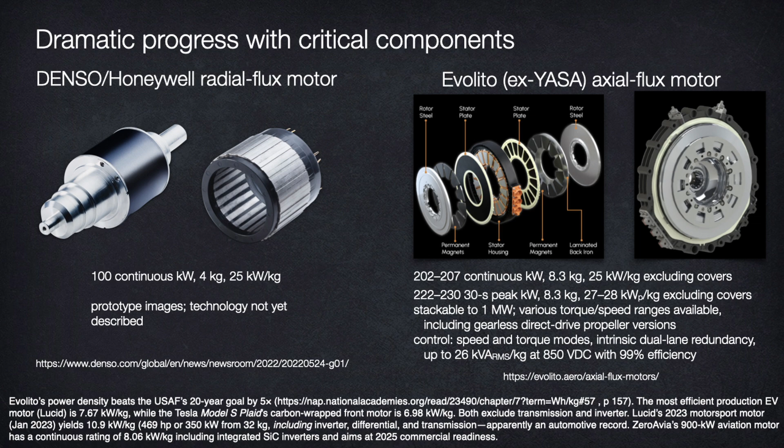That's nearly 3 times more power dense than the best EV motor from Lucid. It's about twice as good as the best e-racing motor. The example on the right, which you could stack up to a megawatt, beats the Air Force's 20-year goal by a factor of 5. That's out of Oxford.

Sleeker, lighter planes also need smarter motors and batteries, but those do not suffer lower efficiency as smaller gas turbines do. And top analysts now agree that EPs will generally have lower capital cost and lower operating costs than fueled planes, and that will drive rapid adoption in both commercial and private aviation.

In case you worry about critical materials, many fine light motors, both induction, also known as asynchronous, and reluctance machines, have no permanent magnets. And there are 2 kinds of supermagnets that contain no rare earths. One of them is iron nitride that promises to be up to twice as strong as neodymium iron boron. That stuff's entering the market.

Inverters are progressing from silicon switches to silicon carbide to nearly lossless passively cooled gallium nitride. Kilovolt silicon carbide switch ratings now make wiring small and light. And the powertrain in that Dutch Lightyear EV is 97% efficient battery to wheels, 2 points ahead of the Mercedes developmental car I showed you. The best e-racing motors and inverters each are about 99% efficient. So a lot of losses still to go away.

So electric flight is becoming practical because many diverse technologies, not just better batteries, are converging in this kind of vast Cambrian explosion of innovation.

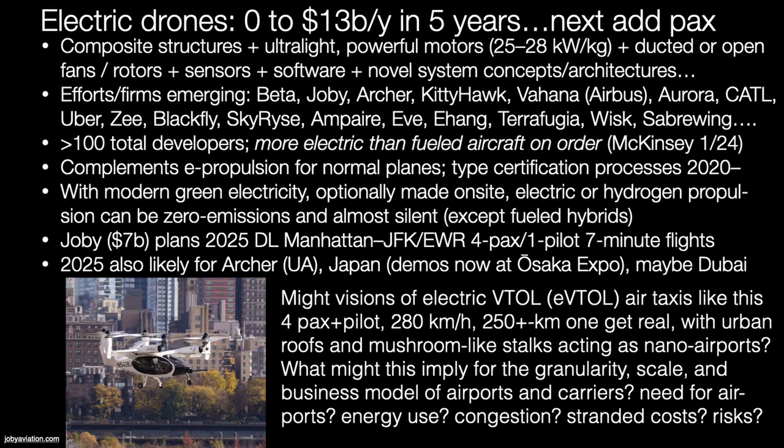When McKinsey estimated a future air mobility order book of over 21,000 aircraft, not all firm orders, worth $118 billion. And altogether, they found more electric aircraft than fueled aircraft are on order in the world.

And then there are over 9,000 electric vertical takeoff and landing, or eVTOL, air taxis, millions of drones, and military R&D, all further enriching this e-aviation ecosystem.

Joby's planned eVTOL taxi service around this year from downtown New York and LA to JFK, Newark, LAX airports looks on track so far. Their first delivery to the Pentagon was last year, and Joby announced today its successful testing a week ago of the challenging transition from vertical to horizontal flight and back.

They've now had 3 pilots doing that routinely. That firm has raised $2 billion from investors such as Toyota, Intel, and Delta Airlines. It ended last year with nearly $1 billion of cash on hand, plus another $500 million receivable. Two years ago, they got FAA approval to carry passengers.

Archer just did that as well, and they hope to start serving United Airlines this year. It's not hard to see the attraction: London Heathrow to Canary Wharf in 11 minutes, 85 to 93% faster than by car, and you're confident of getting there. Prices should soon fall below helicopters, and around 2030, a lot of analysts think they'll match the price of an Uber premium car.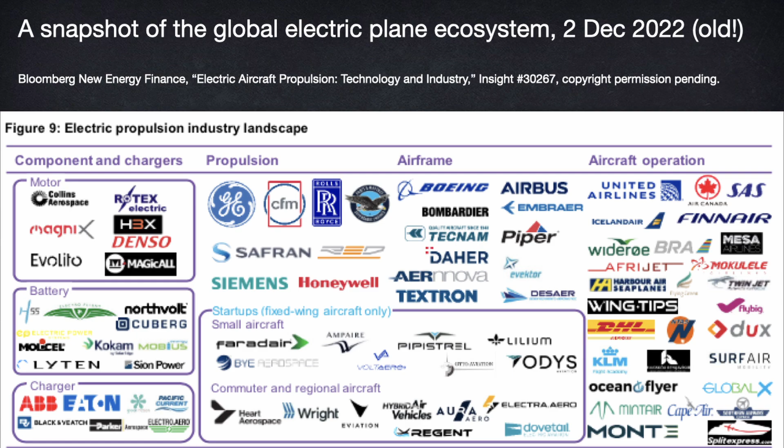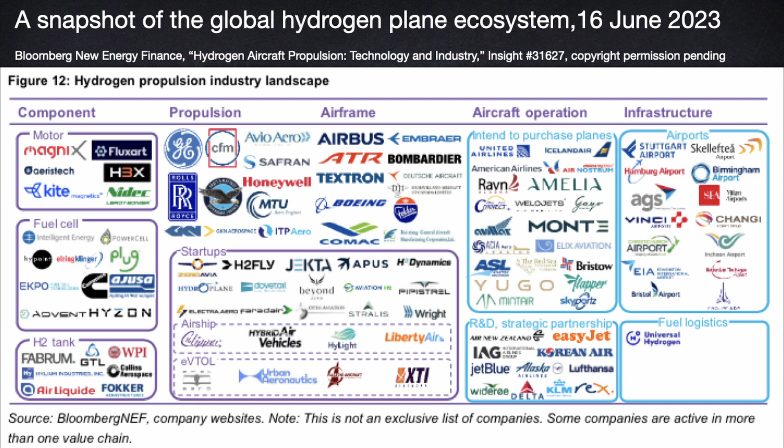Or consider these counterparts in the hydrogen plane ecosystem. Now, to be sure, Airbus just slowed its hydrogen plane program by 5 or 10 years, mainly due to slow development of airport and fuel infrastructure. But as we have seen, tenfold carbon savings offer juicy economics without hydrogen. Hydrogen also gets easier as planes get far more efficient and hydrogen production gets decentralized.

So I think it's more likely that incrementally minded incumbents and commentators are deceiving themselves and likely to miss their flights. Now, I mentioned earlier battery energy density.

The most advanced civilian solar airplane a decade ago was my buddy Bertrand Piccard's Solar Impulse 2, at 260 watt hours per kilogram at the pack level, which weighed 2,000 kilograms to take off, and it circled the globe. Well, now, 9 years later, at least 3 firms have doubled the pouch cell's energy density used in smartphones to 400 or 500 watt hours per kilo. That's about 3/4 of the pack energy density that the National Academy said 9 years ago would take 20 years. Some firms are around 900, at least on the lab bench.

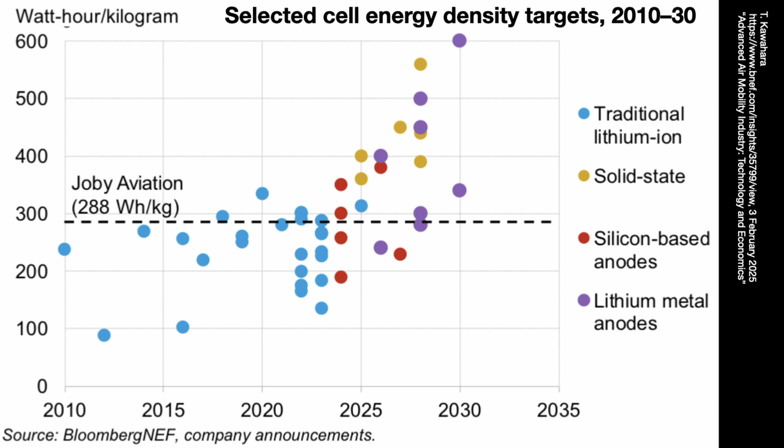And the lithium battery giant in China, CATL, announced 2 years ago a condensed battery with around 500 watt hours per kilo at the cell. They also mentioned a little partnership that had tested a 4-ton electric civil aircraft. In another 2 or 3 years, they say an 8-ton version with 2,000 to 3,000 kilometer range. Companies like that can move really fast.

Now, without digging into all the technical details of the batteries, we can get back to this if you want. I just want to emphasize that battery energy density is fungible with platform efficiency.

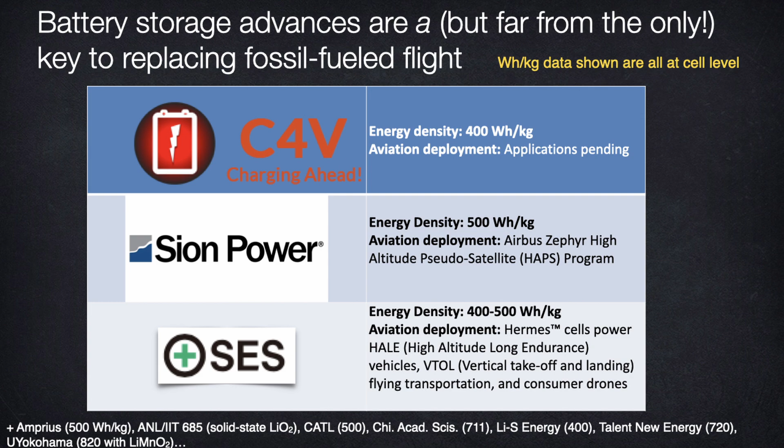I've been riffing back and forth between the aviation and automotive revolutions because they inform, supply, and feed on each other's. Planes do go faster than cars. I think that's now true of their respective innovations. And there may be innovation drivers lurking just outside our view, as happened with lithium batteries.

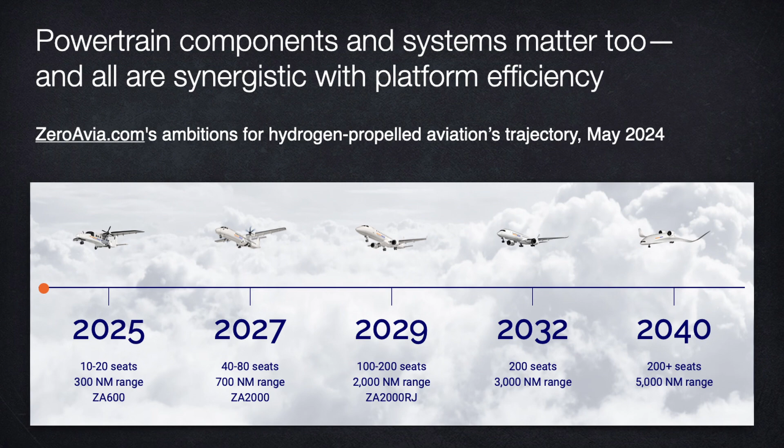I think I'll skip over the hydrogen details. If you go to the ZeroAvia website, that's a partnership based in Britain with British Airways, United, Alaska Airlines, Schiphol Airport, and a bunch of others, you'll find a very ambitious timeline, but it doesn't look unrealistic.

And we see a lot of examples of this. Piccard is now heading for a round-the-world 9-day nonstop flight planned for 2028 using liquid hydrogen. And it's really unwise to stand with your back to a stampeding herd of technobison.

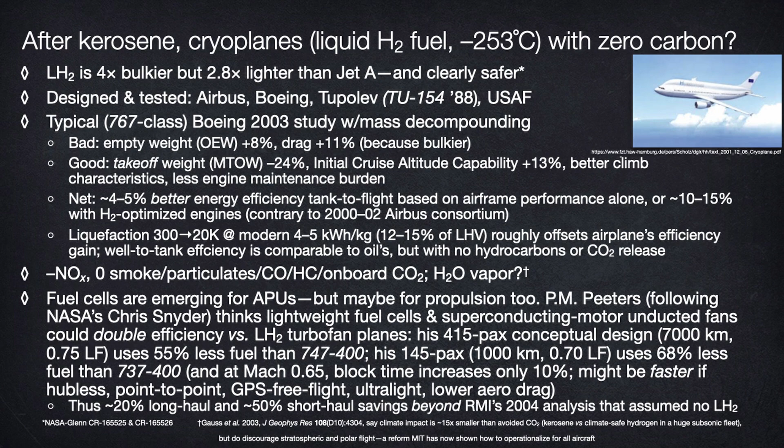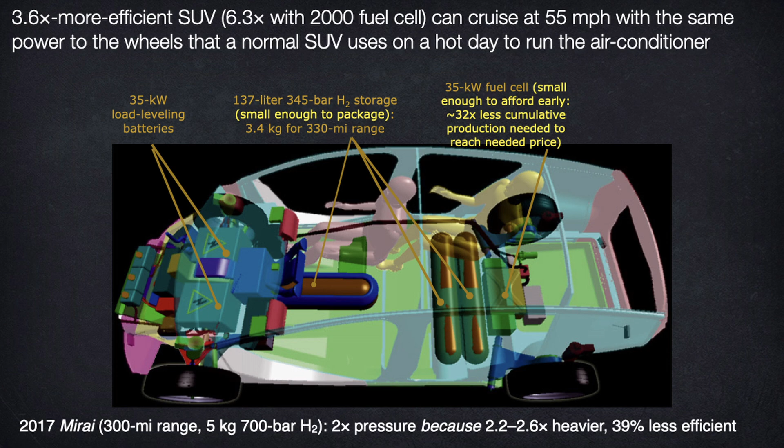Let me end with a few little illustrations of what can happen. Again, we can go back to this if you like. This is some old good Boeing work on cryoplanes using rocket fuel, that is liquid hydrogen, and it turns out to be a lot safer than Jet A is. And it's just like cars, where radical automotive fitness made the powertrain in our SUV 3 times smaller. So it turns out then you need 30-odd times less cumulative production volume to get to competitive cost.

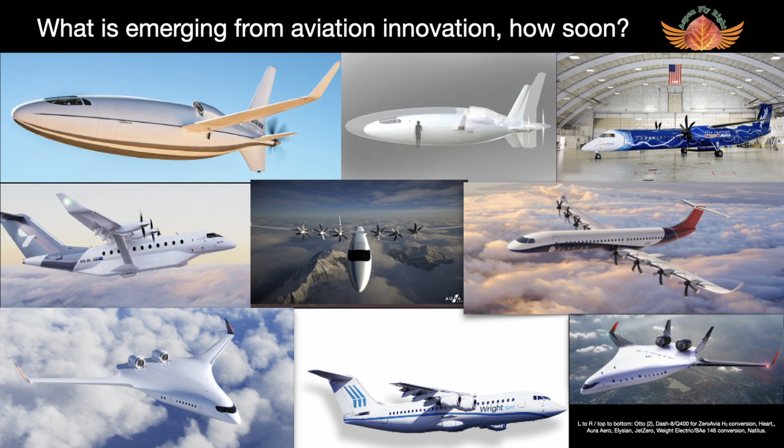And to be sure, these are still targets promised to investors. They're not yet fully developed certified realities. Some specs and some dates will slip. But there are so many and so capable firms in this game, I think they're unlikely all to fail.

These are only a third of the industry plans we analyzed. Those are a fraction of the total. There are still quite a few in stealth mode. So this is one corner of a large bestiary. And if you look at the timing of how fast these things are planning to enter the market, it's pretty clear that it's going to far outrun most analysts' expectations.

So I'll close with a challenging opportunity that I offered the industry in keynoting its 2019 ATAG conference in Montreal, and that addressed ICAO, both sponsored by Boeing, both very warmly received by Airbus and by the major suppliers. It's an implementation concept that a lot of them loved, and I think could help bring to fruition many of the technical ambitions I've described.

For a decade, we have had the technology to create 3 to 5-fold more efficient airplanes if someone would make them and someone would buy them. Now there are even greater gains clearly in sight. Why should we take a century to do that incrementally when we can leapfrog straight to it?

Well, because major airplane buyers, even if they have the capital, are understandably risk-averse. Airframe makers don't want to risk huge development investments for a radically better product that might not sell. So incrementalism prevails as we squander fuel, money, carbon budget, and precious time. The climate crisis will not wait. Business as usual won't work. Aviation's license to operate will erode, and our shareholders and voters and children will judge us negligent.